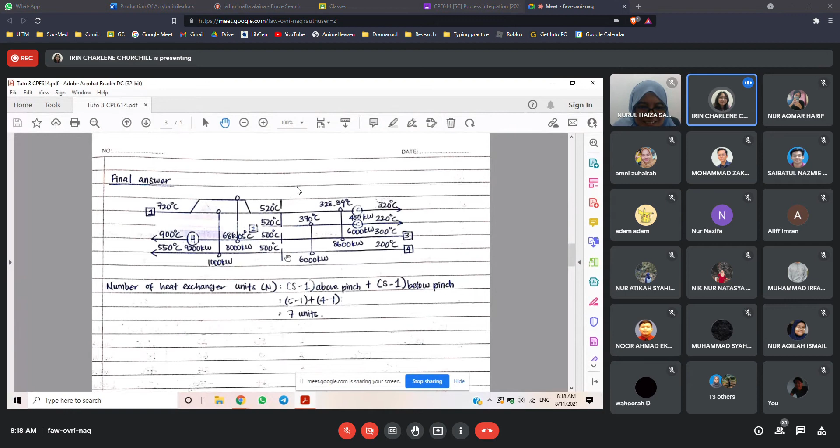Oh no, did I do something wrong? Oh wait, no, this is okay. So 400 kilowatts and the 6,000 kilowatts. There's two coolers, and if we do the feasibility, it is feasible. And then this is my final answer. So there are 7 units of heat exchanger, 1 heater, 2 coolers, and there's a split here on the first stream. Okay, so any questions?

All right, good job, Irin. Round of applause. So I think your answer is already correct there. Do we have any questions from your fellow classmates to Miss Irin?

I like that your work is... ada nak tanya soalan? Sila. Tak ada? I like that your work is very kemas, so that's good. Oh, okay, thank you. Yeah, and it seems like semua dah betul sih.

So the typical way to go is macam Irin sebut lah. So you have to go through the PTA first, and then after that go through that stream. Maksudnya tengok number of streams, and then you tengok the CP, and then you do the matches. So Irin sini dia buat 0.05. 0.04 is it? 0.05.

What's your splitting ratio? Oh, so it was, wait, 5 above pinch. Okay, so the CP, yeah, 40 and 5. Because I wanted to make it, kan this one 1000, so I wanted to make it 1000 also, like in the example too. So that's a really good way to go about it lah.

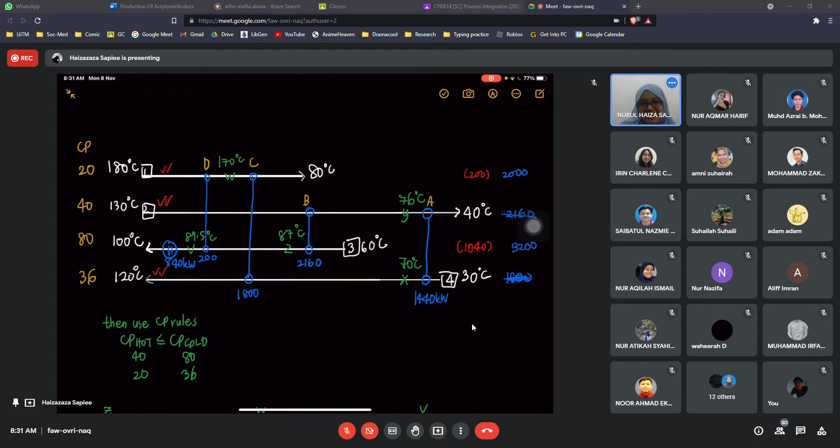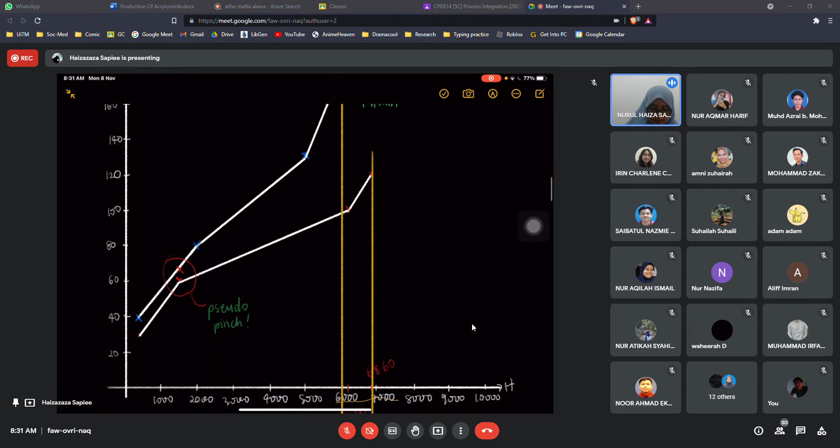Alright. Cool. So kalau guna teknik pseudo pinch, actually if you use composite curve, kalau kita buat, you akan dapat gambar yang macam ni lah. Sebab tu susah. Sebab tu dia jadi macam pseudo pinch, sebab it's like a pinch, and sebab tu you dapat at 7 degrees you get these two zeros lah. So when it's two zeros, maksudnya this is not actually a pinch but then it acts like a pinch. Sebab tu dia pseudo pinch kan.

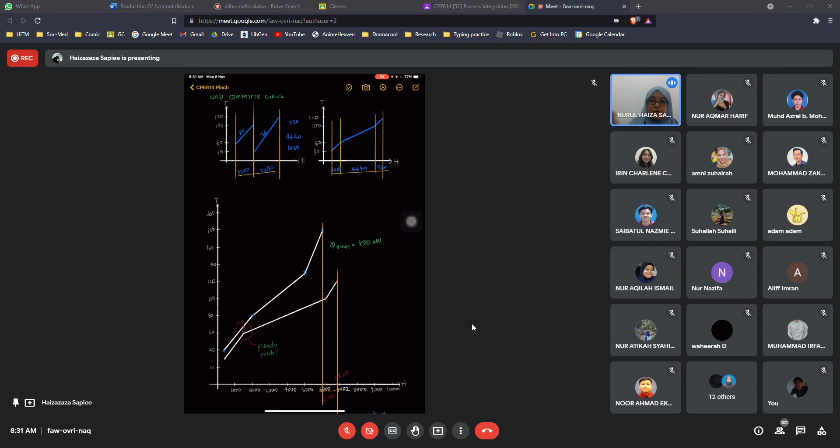But it's a threshold problem, but you can treat it, you can design it macam mana yang Akmal design tadi lah. So you can easily just do it above pinch and below pinch and you dapat design macam ni. So this is exactly what Akmal dapat tadi. So yes, that is correct kan.

But then if you do from PTA and you use delta T min of 6, you would actually get that the QC min would become 0 kan. And then you nak buat matches sebab you nak buat dia macam above pinch. Tapi bila kita buat tak feasible. So you nampak kat sini, I do the first matches using a CP table. So CP hot, CP cold. Nampak kat sini 80 dengan 40 kan. And 36 and 20 kan. Tapi bila buat yang heat exchanger A tu dah jadi tak feasible kan.

So because it's not feasible, this is another method that you can actually try for threshold problems or any cases which have hotter cold streams. Ataupun basically bila kita buat dia tak feasible lah. Kita dah cuba kan semua and it's not feasible. So this is another method that we can try. So again macam Irin tanya tadi kan, maksudnya kita try and error kan? Yes, so this is the time where kita main try and error lah.

So this method is from Associate Professor Dr. Siti Shawalia Idris. She's also another lecturer teaching this course. She did her masters in pinch, so she kind of has a lot of experience on this area jugalah.

So what we basically do is we akan start at the non-utility end. So we cari mana yang paling constraint. So remember kita dah buat, kita dah cuba maximize load. So kita basically dah buat CP table. Kita dah tahu, okay, we're treating this as above pinch kan. Kita buat CP table, biasanya kita akan buat match macam ni lah, A dengan B ni. And A ni tak feasible. So sebab tak feasible, then kita akan buat dekat non-utility end. So what it means by non-utility end, kita akan solve it from here lah, from your imaginary pinch. And then you match streams closest to dia punya pinch.

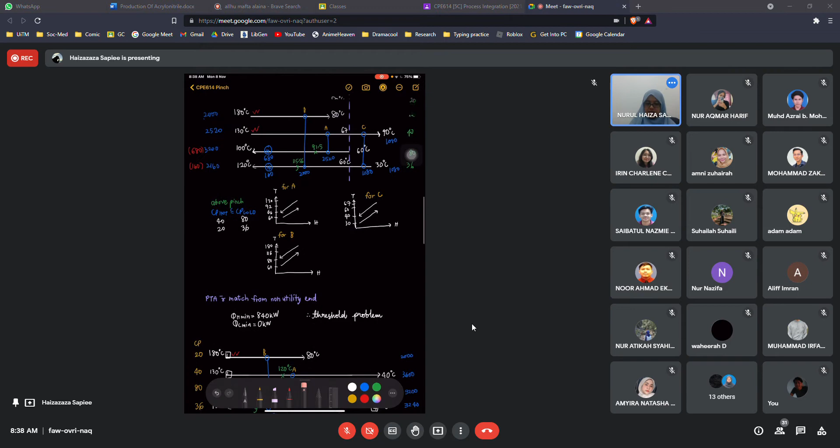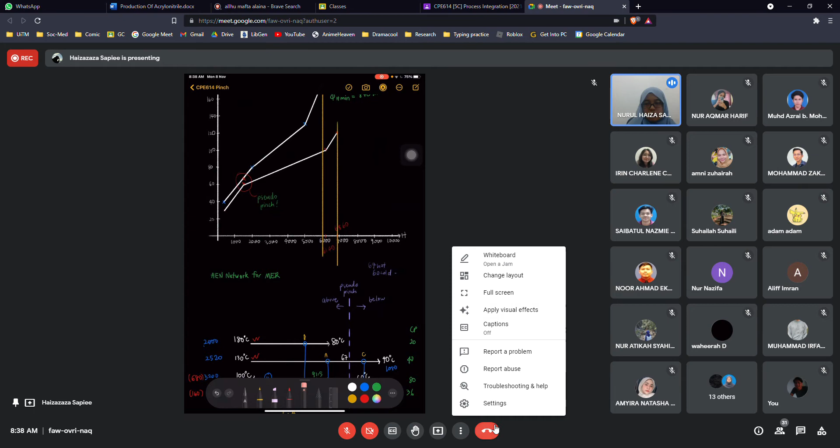So any other questions for this one? Tapi this question, I didn't realise if you change it to 7 you get 2 pinches, tapi kalau dapat 2 kosong tu and dia punya utility kosong, maksudnya it's a threshold problem, you can treat it like a pseudo pinch. So macam mana Akmal tunjuk tadi. So yeah, basically that's pusing-pusing.

Okay, so basically that's it for this tutorial, and I think there's a few questions here. So let's see if we can answer them. So hopefully yang tak dapat, you guys can try it out. Ada yang kata you need more exercises on threshold. So threshold ni I nak kata it's quite hard, ramai orang kalau dibuat pun it takes time lah. So kadang-kadang kita buat tak dapat kan. So bila dia tak feasible tu dia memang a bit frustrating, but just don't give up lah.

So Alif, do we have to ignore below pinch since the pinch point for question 2 is 63.5 Celsius even though we have streams that have lower temperature than pinch's temperature? Ini tak faham soalan ni macam ni? Ke dah terjawab? Doktor dah jawab tadi. Okay, dah jawab. Sebab ingatkan tak perlu tengok pasal below pinch, sebab dia adalah threshold problem. Okay, faham? Okay, that's a good question.

I'm not sure if I have to split hot stream at below pinch question 2, as the CP hot is already lower than CP cold, but I'll keep trying. So kalau you try buat, adik nak cakap ke? Oh tak doktor, yang tu saya tersalah tengok soalan. Okay. Alright. Itulah saya pun muskil apa maksud dia. Okay, cool. So that one should be alright.

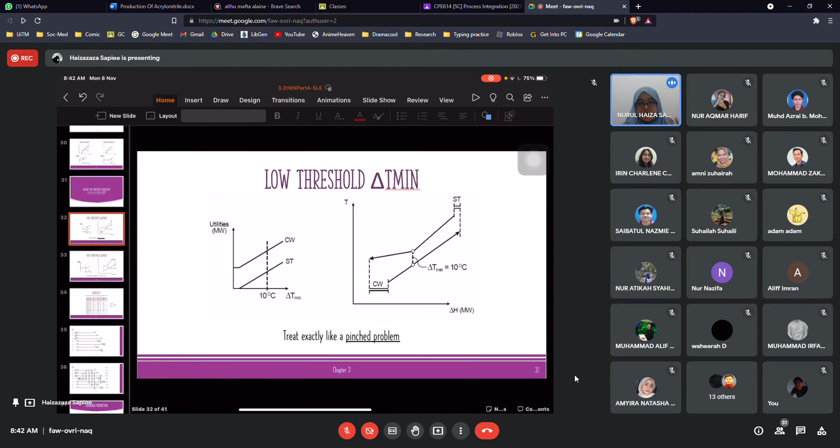So when it goes above 7, when you get it at 10, you end up having both utilities. So you can solve it macam biasa kan. But then bila kita buat, you could actually realize that it's a threshold problem lah. Tapi kalau high threshold problem, macam mana pun kita buat, kita akan end up having it only be solved by one way lah.

So kita takkan ada pseudo pinch tu. So yes, there are these basically different types of it. Being aware of the type is also very helpful lah kot untuk kita tahu macam mana kita nak solve. But unless the question states to use threshold problem ataupun a specific way, I don't think you'll be penalized if you use pinch solving. So macam tadi kan, kita solve macam pinch pun should be tak ada masalah. So should be sama je.

I didn't draw the graph of feasibility and just calculated the temperature. Will it affect the marks on the test or not? So yes, if you don't draw the feasibility and just calculate, basically if it's feasible then it's fine lah. Some people like to prove that you can get the feasibility just by looking at the temperatures, and technically that is correct pun.

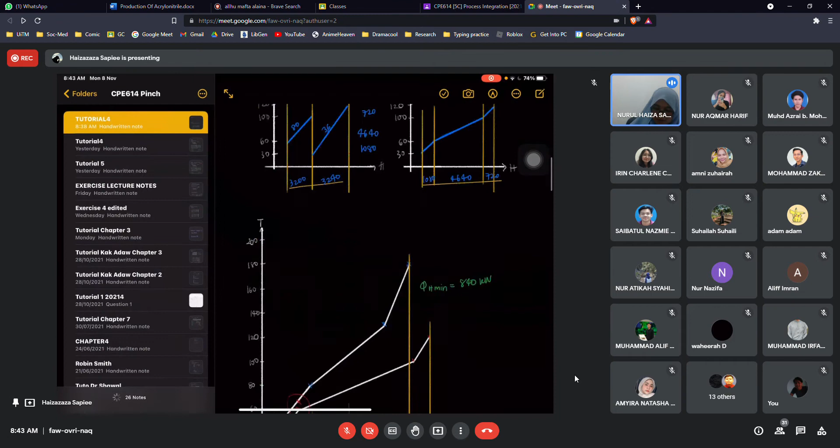But some people dia tak boleh nampak kan benda tu. Contohnya macam ni kan. So kalau dia tengok kat sini, I don't advise it because it might get confusing at some point. So contohnya kat sini, dia ambil temperature ni dengan temperature ni kan. So basically you're already doing the feasibility test lah. So bila kita compare ni, you already know it's feasible. So yes, you can actually say it without doing the graph.

So you can say it without doing the graph, but it would be a lot easier if you show it lah to prove it. So if the question memang particularly minta for feasibility, you have to write it because there will be marks on it. Kalau tak ada, kita akan deduct markah lah kat situ.

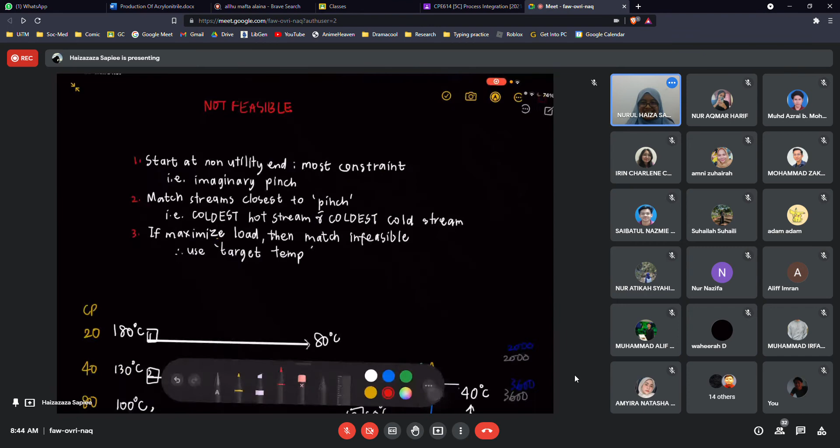Okay, so that's all for our second tutorial, our third tutorial. Do you have any other questions from anyone before kita move on to lecture kita? Sila abaikan background music. Any questions? No? So semua happy eh?

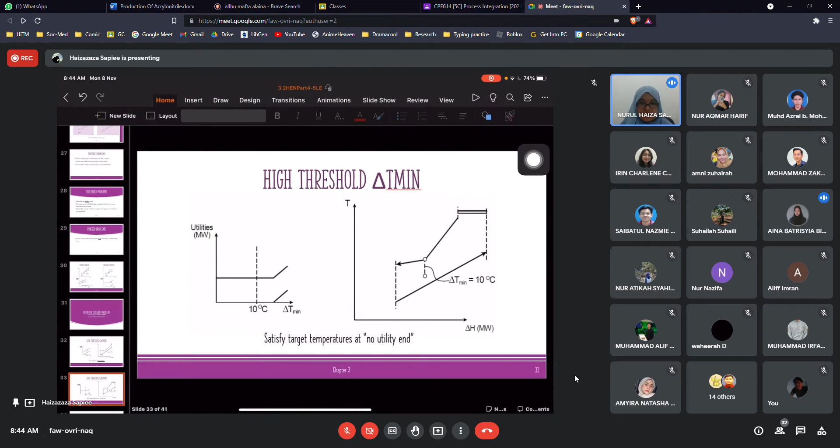I wanted to say something. So far okay. Oh, ada yang remind, and I thank you very much, Sue. I like that you always remind me to drink water. So Haila, you want to ask a question? Oh, that's me. I remind you to drink water. I know. I always read it because sebelum ni pun you always remind me. Every time you say that, I terus nak get a glass of water. Yeah, it's a good thing. Yeah. Doctor,

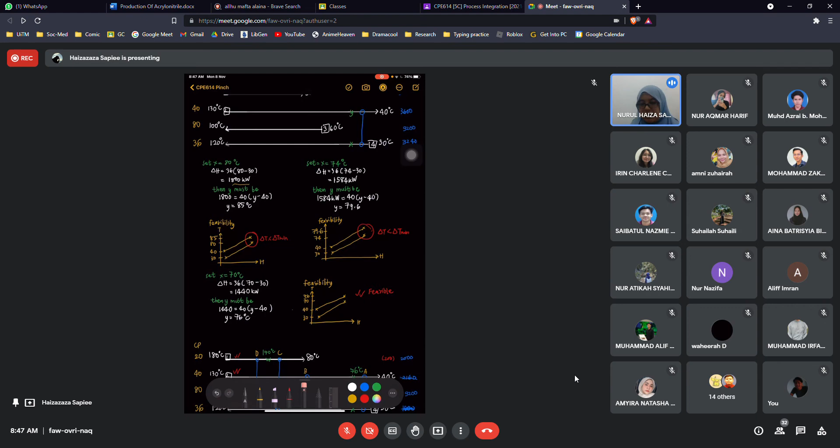So why I chose 80 is basically sebab when I was looking at this temperature, dia 100, 120, difference dia 20 kan. So I'm thinking, okay, kalau 100 is still tak cukup kot. So I started at 80. Ada certain people dia lucky enough to start at 70. So no, there isn't a particular rule of thumb, but we can always make an educated guess. But yes, threshold problem dia memang take up quite some time lah kot untuk kita buat.

So I hope that sort of answers your questions. Syahila? Yeah, thank you. Okay, cool. And if anyone's keen, satu lagi question yang agak susah, and it's a threshold problem juga. And probably you guys can try it out if you want. I'll just post it in the WhatsApp group lah, if you guys are keen to try it out and then see if you can get the answer lah.

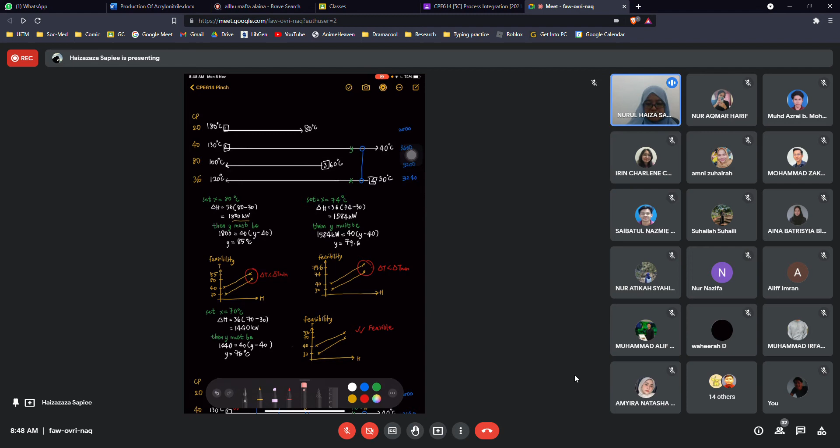Tu just add on lah kalau siapa nak try. So you can try to do it. That one's also a tricky one lah. So that one you also have to use something like this. Tapi certain people end up splitting it. So you can get a variety of design lah. But I'll just put it up for you guys if you want to do the extra practice lah.

Okay, so if that's all, is everyone happy for us to continue to our lectures? Yes. Okay, cool. So tak ada yang nak break ke apa? Semua okay ke? Okay. Alright, fantastic. So alhamdulillah, I'm happy that everyone's tried the questions.

I think the new era is a lot of students dia suka cari cara lain untuk study and I understand that since our pandemic, a lot of people have been turning to Chegg, and a lot of people have been uploading questions there. Please do know that your lecturers do know if you end up posting things there. I guess because it's a tutorial question, I don't really mind. I don't think lecturers really mind because it's a way that you guys can study.

But if it's assignments ke, task ke, please refrain from doing it because it would macam rugilah kat you guys, and at the same time we don't really know macam mana kita nak properly learn it lah. So God knows kan what everyone's doing. Tak ada orang akan tahu pun siapa buat, tapi at the end of the day, it's our own honesty lah. Kalau kita dapat markah tinggi, would it be a blessed punya markah kan? Ataupun nanti kita markah tinggi and then suddenly bila kita kerja pun jadi susah kan.

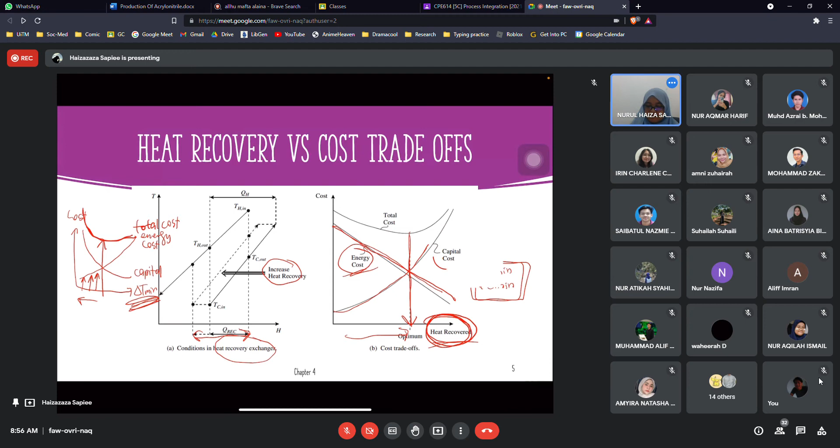Yes, no? Adakah senyap? Okay. Okay. Alright, cool. So alhamdulillah.

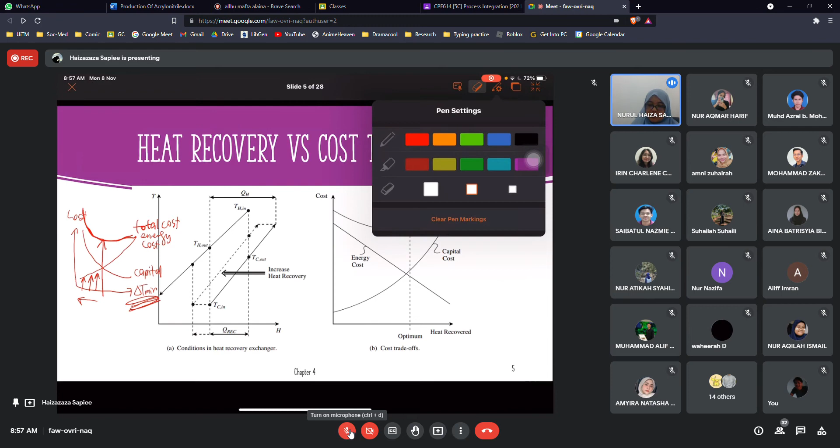So basically that is kita punya trade-off lah. So for kita punya capital cost, there's a lot of things that actually affect the capital cost. Amongst it is these 6 things lah. So first things first is dia punya number of units. So number of units is when we're talking about your heat exchanger units lah. So it's like for example kalau kita ada berapa banyak number of units that we calculate.

So remember, if we perasan, we always try to minimize it, and so when it's more you will increase your cost, because you need more equipment to introduce heat exchangers lah. So obviously, if that's still not clear, 9 HE is more expensive than 5 HE, contoh dia. So we will always want the less number of units. Kalau number of shells ni macam shell and tube lah. So it's basically again talking about the equipment, the heat exchanger itself.

Materials of construction is the type of material that we use, either it's stainless steel ke, copper ke, iron ke. It depends on what end. And I think this one you've looked at in a different cost and design materials, something like that. But that's not covered in this course lah. But if you want to read more about it, you can read kita punya textbook Robin Smith tu, because dalam tu dia memang cerita lah pasal semua.

Equipment type, so what type of equipment that we actually use for our system. So this will all contribute to the capital cost, and we're talking about other than heat exchangers lah. Or pressure rating, so again this one's apart from your heat exchangers, so higher pressure rating, when we're talking about steam, would introduce a higher cost. And lastly the area, so area ni is area of your heat exchanger. So if your area is bigger, it would require more cost, more money lah.

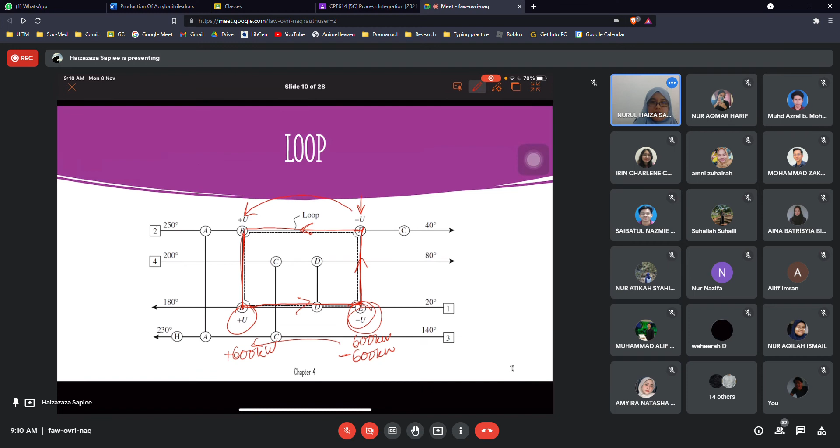So contohnya kalau this heat exchanger tadi is 600 kilowatt, kan? So we can minus 600 kilowatt kat sini. So kita akan plus 600 kilowatt dekat sini. So basically kita ada dia punya heat exchanger yang cover dia punya loads yang ada. Okay. So that is one loop, but the loop tak semestinya akan macam square saja kan. So it can also look like this. So see how it goes from B to D and then pergi ke C. Lepas dia pergi C dia pergi A pula. Lepas dia pergi A dia pergi B.

So it doesn't matter how it looks like, but what's important is that it starts and ends at the same heat exchanger. Okay? So make sure that dia lalu heat exchanger saja. So some people nanti dia lalu stream splitting, kalau dia contoh kan, ni boleh kan, tapi dia tak boleh tau kalau tiba-tiba kat sini. Lepas tu dia nak pergi kat E, lepas tu nak pergi kat B. Tu tak boleh sebab this is not a heat exchanger. So this one I thought it was obvious kan, tapi some people dia buat juga kan. So ni tak boleh sebab you must selalu lalu dia punya heat exchanger.

It's like you're trying to cut the path in between kan. So you cannot simply just take in the middle of the heat exchanger. So it must be daripada end to the end kan. Okay. So that is your loop. Ada any question tak untuk loop? Doktor, untuk yang negatif positif tu dia bergantung kat direction ke ataupun ada properties lain? Very good question. Bagus Zak ni. So thinking in advance kan.

So it will alternate actually. So dia akan plus minus. So dia ikut benda ni lah. So contoh yang kita gerak kat sini kan. So yang ni plus, yang ni minus. Okay. So kalau yang ni plus, ni minus, dia lalu sini, dia jadi plus balik. Okay. And then dia lalu sini, dia jadi minus. And dia patah balik sini. Maksudnya alternate untuk setiap heat exchanger yang sama tu lah kan? Betul. Okay, so it will alternate untuk setiap heat exchanger. So sorry iklan pula. So yes, dia akan alternate untuk setiap heat exchanger tu.

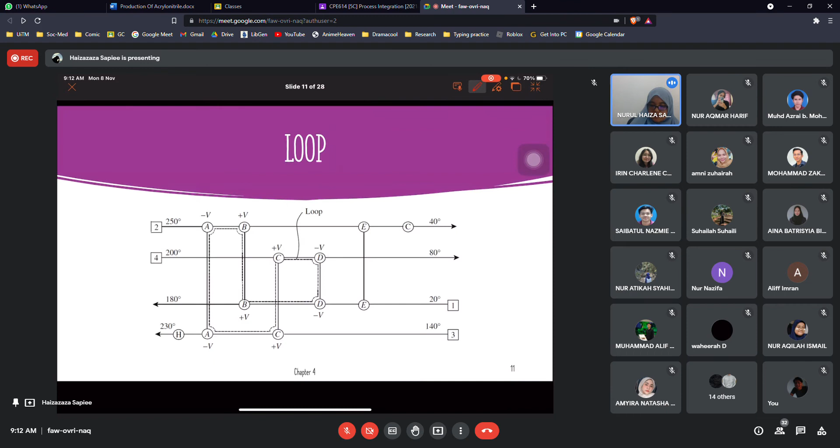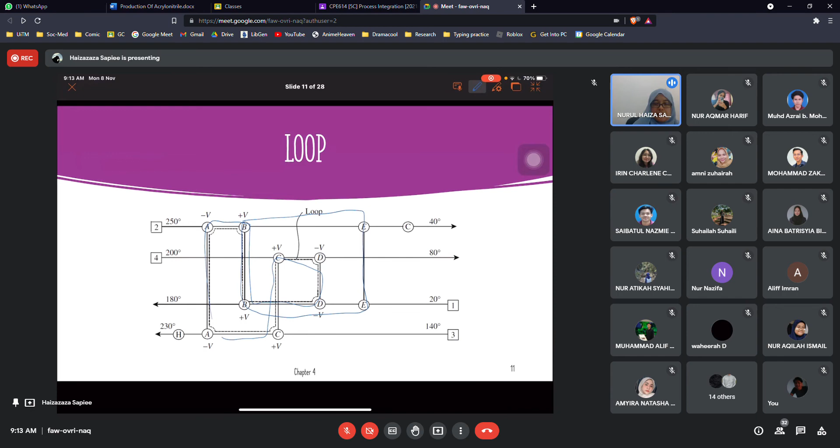Tak ada? Semua happy? So loop ni just be reminded that it can come in any form lah. Tak semestinya macam ni tadi kan, satu saja. You can also become like this juga. So it depends. Some people dia nampak yang direct, ada yang dia nampak yang macam tu. So it should give you the same answer at the end, and it should still be correct. So that is your loop.

Kalau path pula, kalau loop dia maksudnya must start and return at the same heat exchanger. Kalau path, it connects a heat exchanger between two utilities. So daripada one utility to the next utility. And again, you can shift your loads along the path. So another way to describe these two utilities is basically a connection between your heater and cooler. So daripada heater pergi cooler. And usually what we use our path for is to correct our T-min violation. So maybe tak clear sangat, tapi we're going to see that kejap lagi in an example.

So this is an example of your path, ataupun dipanggil utility path. So it starts at your heater, goes through your heat exchanger A, sampai pergi ke cooler balik. So along your utility path, again you can shift your load. So plus minus, sebab dia lalu sini, and then plus. So perasan dia tak lalu B, C, D, E. So tak ada any changes on that.

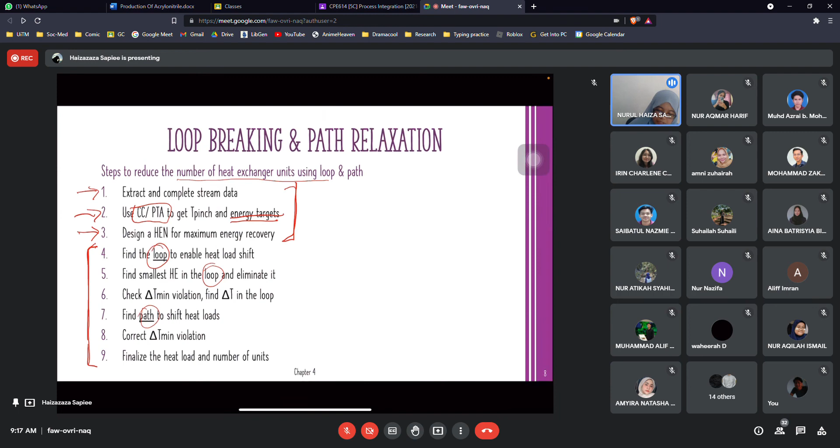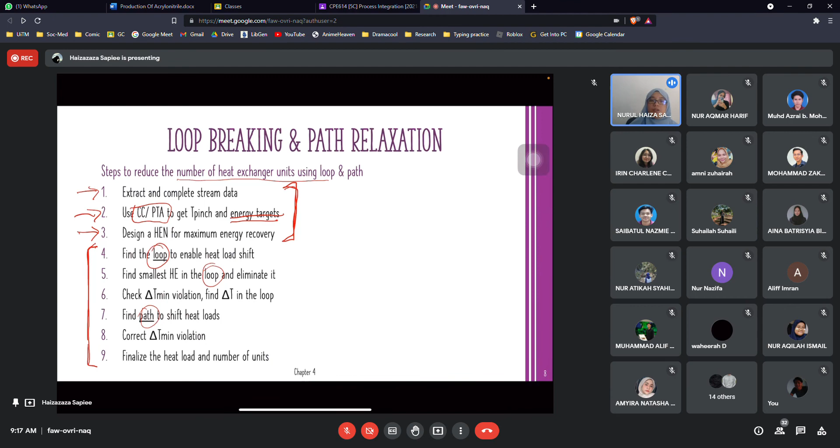So this is the heat exchanger network yang kita design. So sekarang ni kita nak cuba apply loop and path. Kalau kita tengok steps ni, semua kita dah buat. We've already extracted the stream data, we've already used CC and PTA to get the T-pinch and energy targets. We've already designed your heat exchanger network for maximum recovery. And then baru kita boleh buat loop and path. Okay, sorry, distraction.

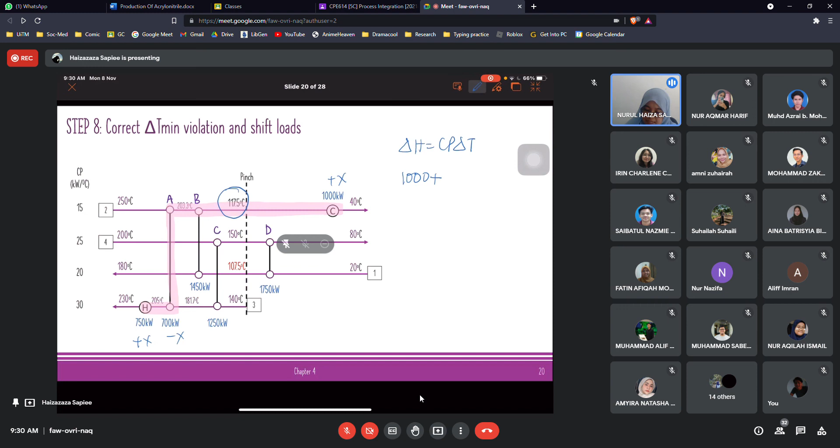Okay, so apa dia punya delta H? Yes. Fantastic. So basically it's 1000 plus x equals to your CP which is 15, and your delta T which sekarang ni kita dah cakap it must be 117.5 minus 40. So kita dapat x kita. So berapa x kita?

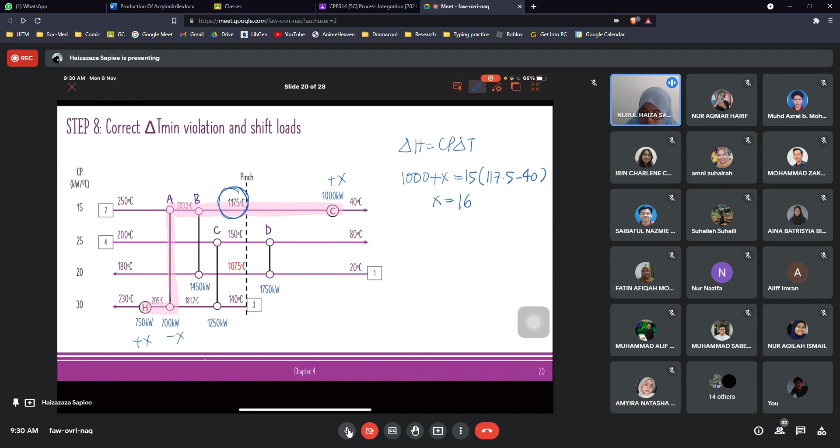162.5. So apa yang kita buat is that we'll put this value in here. So ni adalah kilowatt. Dah masukkan dekat sini and masukkan dekat sini. So bila kita masukkan, kita akan dapat jawapan dia kat sini. So these values dah berubah according to what you've already got. So you finalize the heat load and the number of units. Okay, sampai sini boleh faham?

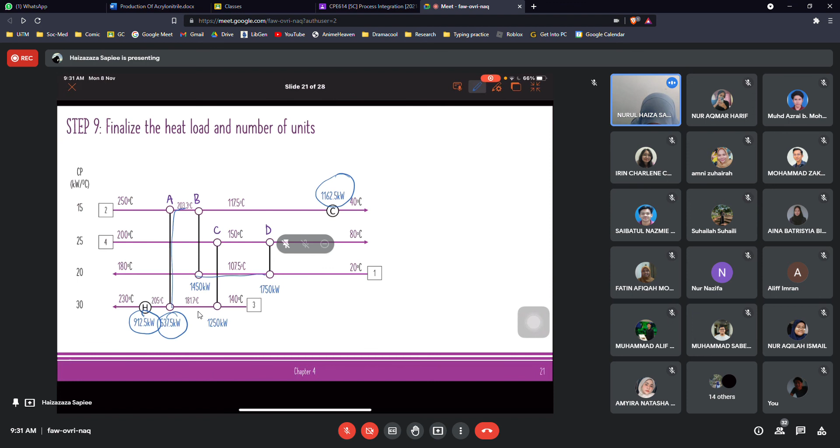So when you get this loop, when there's more loops, that means there's more opportunities for us to reduce our number of heat exchangers. So bila kita buat macam ni, kita repeat balik step daripada awal. So kalau yang ni kita nak remove heat exchanger mana? Which is the smallest? A kan? Sebab dia 537.5. So kita akan minus 537.5. Ni plus, ni minus, ni plus. Okay, so ikut je line ni tadi.

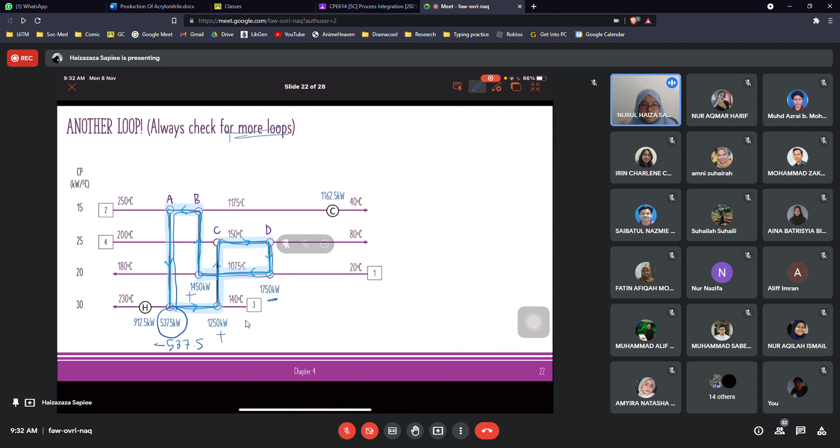Okay. And then dah habis dia punya loop, we check, so we eliminate dia punya smallest heat exchanger. So kita akan eliminate yang ni. So dia akan jadi macam ni. Okay, so remember when we eliminate dia akan jadi minus plus lah. So value kat sini nampaklah dia berubah. Okay. So lepas value tu dah berubah, kita boleh now check kita punya delta T min violation.

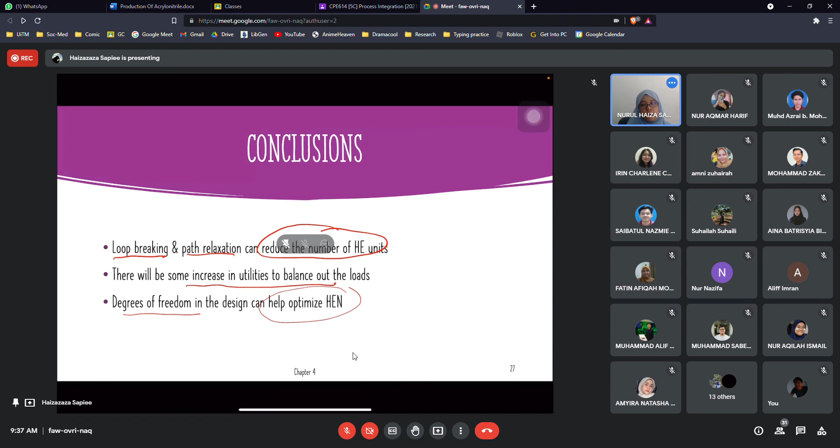So if you try a different loop or a different path, you can see lah you punya answer, but you should end up with basically 5 heat exchangers yang ada kat sini. So any questions for this particular subtopic? For now, no, Doktor. Crystal clear semua? Crystal clear. Alhamdulillah, fantastic. So if you ask me, this topic is quite easy lah sebab dia fairly straightforward. Sorry, dah ada gangguan dekat sini. So basically, if you follow the steps, then you should be fine lah.